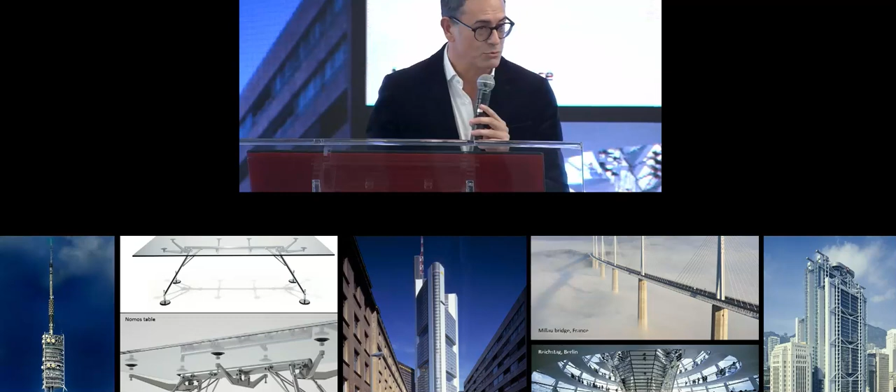Then there was my visit to the Reichstag in Berlin, where Norman Foster was commissioned to build the famous dome. It is an extremely symbolic structure, beautiful from an architectural and artistic perspective, and incredibly intriguing in terms of the solutions adopted. I must admit that Norman Foster's projects often are a source of inspiration for us designers, a way to envision the future. An example of this is the Ferrari F80 that you saw downstairs, a supercar that aims to capture the essence of a very ambitious project and did so with an architectural and futuristic approach.

This brings me to a statement by Lord Foster, one in particular that is as relevant as meaningful for us at Ferrari: as an architect, you design for the present with an awareness of the past for a future which is essentially unknown. Now I welcome Lord Norman Foster, thank him for accepting our invitation, and give him the floor.

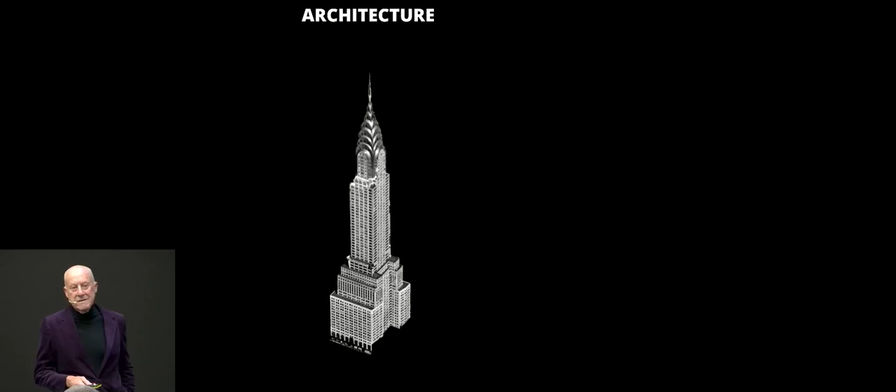New York today is like New York in the 30s. It's a collection of individual buildings, and those individual buildings collectively make up the city. But there are really two worlds: the world of the architecture of the individual building, and the urbanism, you could call it the urban glue that binds them all together. That's the DNA of the city. It's the routes, the subways, the public spaces, the parks. So I'd really like to share some

experiences over my immersion in those two worlds of architecture and urbanism, now around 7 decades. And the theme perhaps that unifies the projects that I'll show, which jump from the past, the earliest projects, to the present, is the theme of innovation. And what do we mean by innovation? Well, it's challenging the status quo. It's about change, and for me, it's about the use of technology for social good. It's about new ideas and methods, and in many cases it's perhaps going back to basics, going back to the

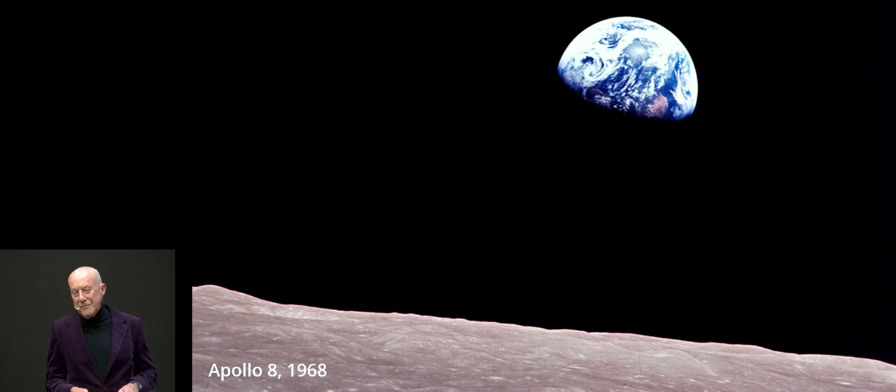lessons of history. And where did that start? It started in the 1960s. And the 1960s was arguably the birth of the Green Movement, although it hadn't been named as the Green Movement then. It was very much a fringe activity. And as architects, we were part of that fringe, seeking to explore an architecture that would relate to that new awareness of the fragility of the planet, which was perhaps initially summed up by the Earthrise photograph taken on the Apollo 8 mission.

But that coincided - that was 1968, and perhaps more than coincidence, one year later, Buckminster Fuller penned the Operating Manual for Spaceship Earth. And Silent Spring, Rachel Carson drew attention to not just the fragility of the planet, but rather the ecosystems that constituted it. And in the popular world, the Whole Earth Catalogue was the transition between the analog world and anticipated a digital future in terms of access to information.

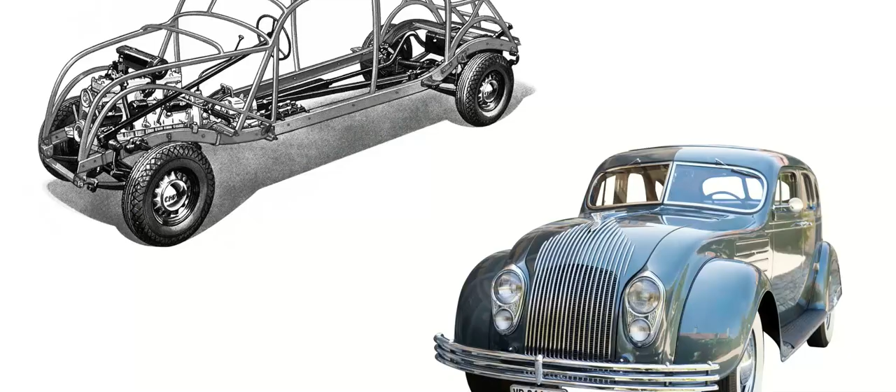Cybernetics was perhaps summing up something that had existed for some time: the idea that a product, a design, was rooted in systems. If you could bring together, in our interpretation as designers, separate systems and merge and unify them, you could do more with less, you could improve performance. Perhaps in automotive terms, that was the Airflow, which was perhaps the first production car that would take the earlier concept of a chassis and a coachwork and bring the two together to make a single monocoque structure.

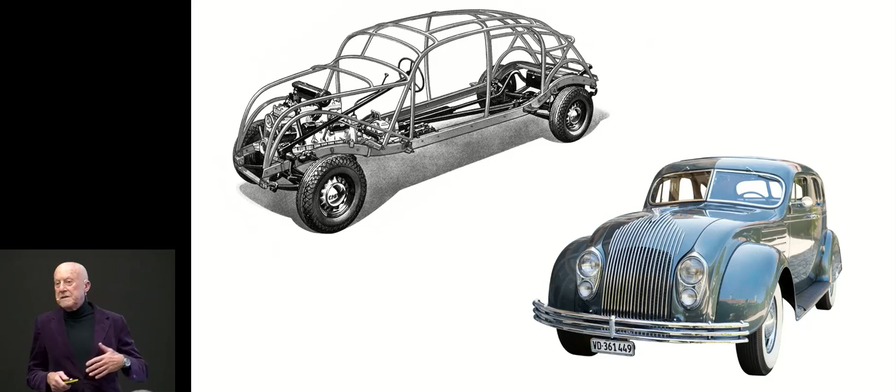Those principles would come together in one of the first buildings, an ultra-low-cost factory for semiconductors, which was the new digital world. I'm talking now about the mid-1960s. If I do a kind of cut-through perspective to show the systems that come together to make that building, it would look something like this.

These colored elements, which you see buried in the floor, are anticipatory, in that the floor slab is more than just structure. It's got the reinforcing rods, but it's also got small bore pipes, so it's doing more than just structure—it's heating and cooling as water pulses through it. And the corrugated metal ceiling has the fluorescent light tube, so it's doing double duty.

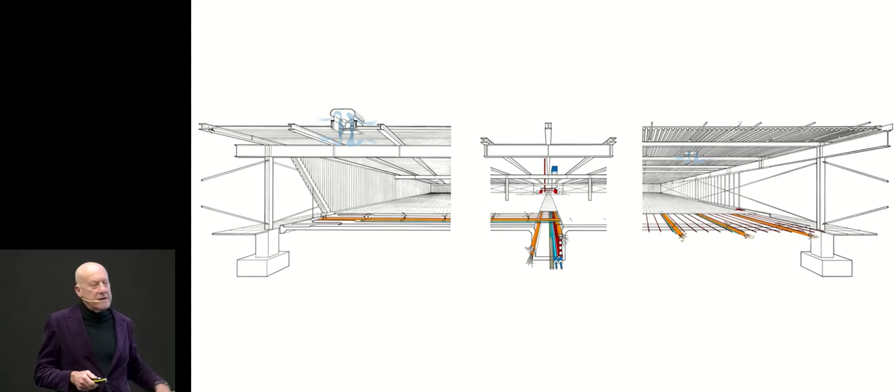If the building was innovatory in terms of its systems, the way in which it came together, it was also socially revolutionary in that it was one single space, one entrance, one standard for management and workers.

Socially, the most deprived area of London—if that was the 60s, then I'm coming now to the early 70s—the most deprived area in London was Docklands, the London docks. That was the scene of militancy. This was a commission for a Norwegian shipping firm.

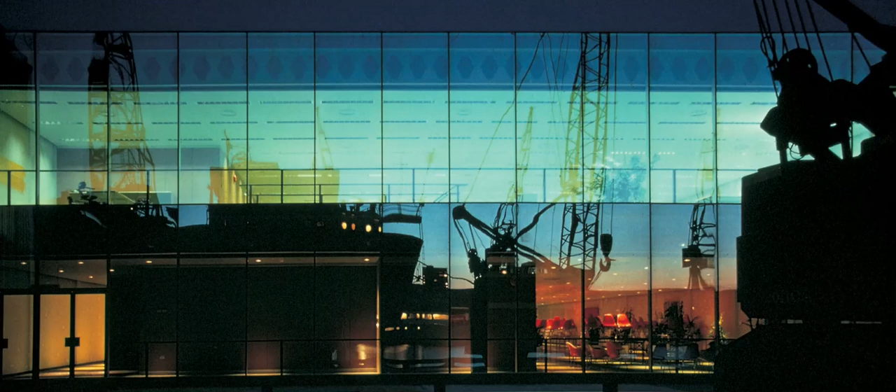Again, those parallel worlds of technological change and social change merged together, and the idea that in one building, revolutionary at the time, those two elements of the workers and the management could come together under one roof.

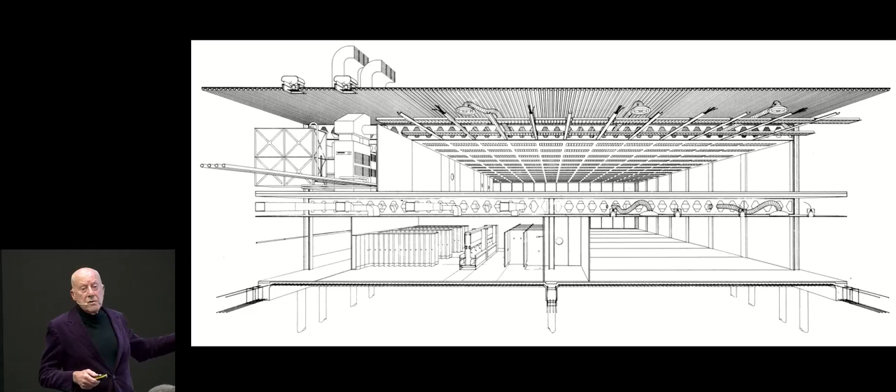So the light fittings would be the extracts for the system of cooling and heating—heat recovery—and the structure would be the perforated plenum. At the bottom level would be extraordinary facilities, like a luxury sports club, unheard of at that time, and offices with carpets, with planting, with art on the wall, with views.

Again, it's very difficult to transport oneself back into that period in the 60s and 70s. What was the typical workspace? It was pretty horrific. So if it was revolutionary in Ipswich, it would have been revolutionary anywhere in the country at that time.

There is a very close relationship in terms of innovation, sustainability, and the natural world, working with nature. One of the earliest projects for the owners of that shipping line, a Norwegian shipping line, Olsen's, was an unbuilt project to relocate headquarters in a pine forest just outside Oslo.

Here you can see the path through the forest, and the idea of the office headquarters being pavilions which would sit very lightly in the forest and not disturb it, with cars held at bay. If I gave a verbal description of this project, it would be almost identical to the Apple headquarters, which I'll show later, built about 50 years after.

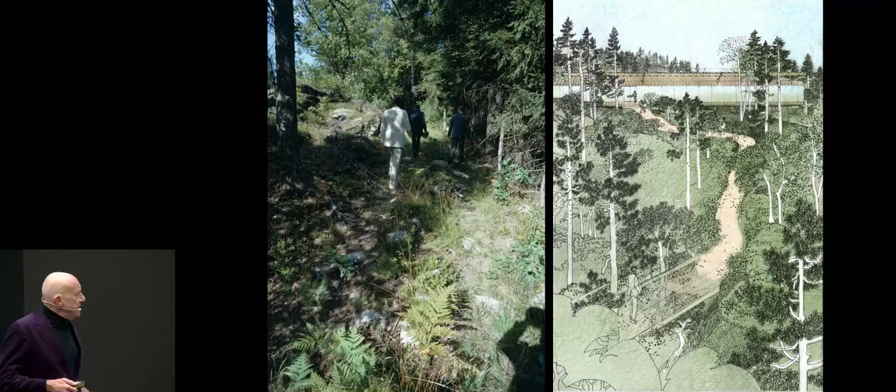This cut-through model shows that it sits lightly in the forest and doesn't disturb nature. There are systems below ground which echo the very earliest sketches: the use of sunlight, mirrors which will reflect light directly into the depth of the interior, working with natural ventilation, a breathing building which is healthier, using less energy, recirculating water, and converting human waste to fertilizer.

At that time, quite revolutionary concepts were embodied in the first built building of that period, which is a center for the visual arts in the University of East Anglia, housing an extraordinary private collection of Sir Robert and Lady Sainsbury. But instead of producing three buildings - one for the Faculty of History of Art, another for a common room restaurant, and another for exhibiting the collection - it's one roof which brings together and unites all those elements.

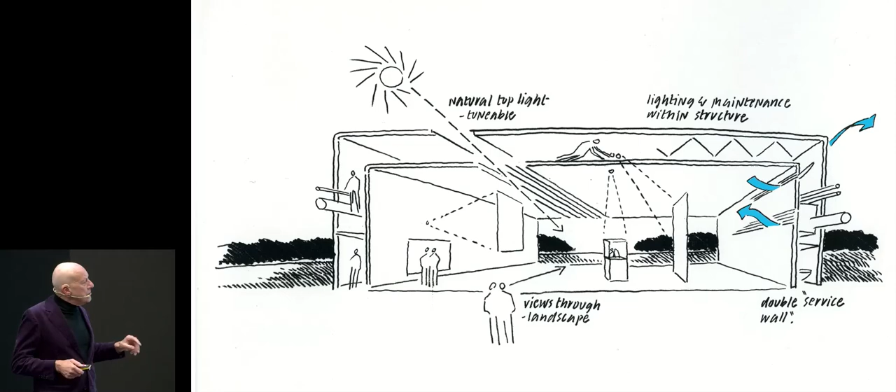As you can see through this diagrammatic cross-section through the building, it's very much about working with the local climate, which is always cool at night, displacing and bringing in cool air, circulating, saving energy, and again, a healthier building. The diagram also indicates that if that is innovatory in its technology, then socially, and in the way in which you might display works of art, it's perhaps the first museum or gallery where there are no walls on which to display works of art.

Instead, it's a series of movable panels, vitrines, and signified by a tunable light box. So it can be filled with natural light or it can be tuned down. If the exhibition is dominant on works on paper, then the light levels can be reduced to more artificial light than natural light. So highly tunable.

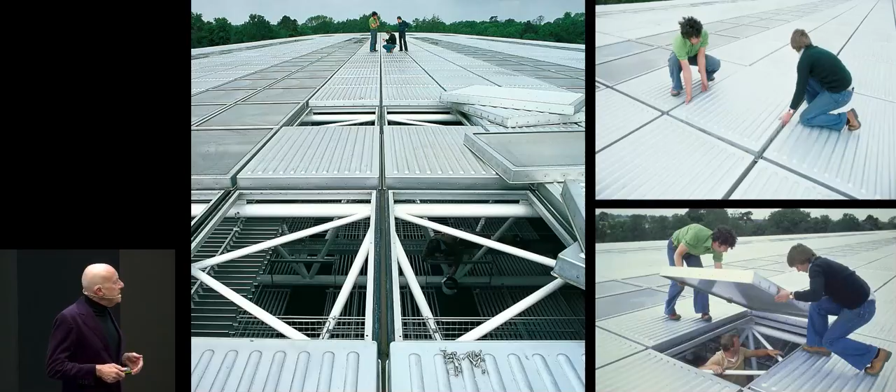If I look at the back of the building and the access to the very discreet underground undercroft servicing this lightweight canopy above, then if it was revolutionary and innovatory as a museum, it heralded all the clues for reinventing the airport. So a reminder really of what the airport was in the 1990s. This is very typical: heavy servicing, moving air, essentially cutting out daylight.

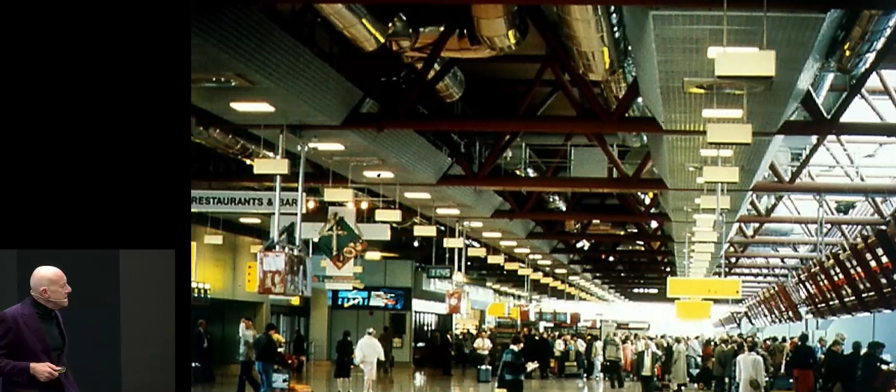If I took a slice through that building, it would look something like this. You would see the image at the bottom, which is how you would experience it as a passenger. If you were on the roof, you'd see all this mechanical plant. You'd have to have scissor lifts to change the light fittings, and for replacement and maintenance of the air conditioning, you'd have to get on the roof. So really, a gas guzzler in terms of energy consumption, quite grim as an experience, and not exactly easy to maintain.

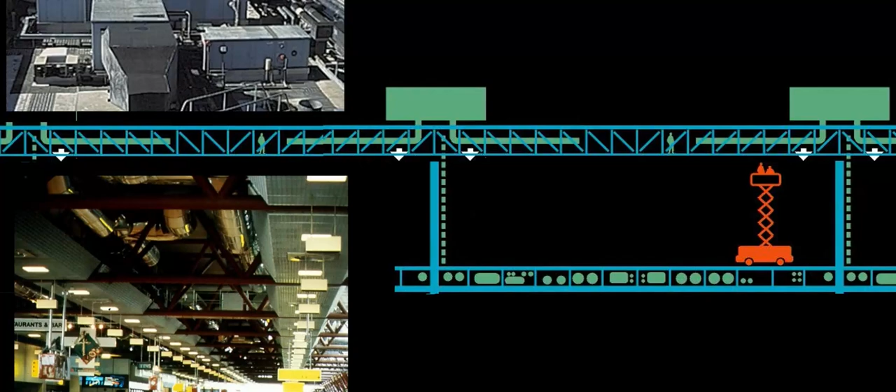So our move, in terms of learning from that Sainsbury Centre model and translating that into a new kind of airport, was almost to turn this upside down. And that transition then: the undercroft, like the Sainsbury Centre, has all the mechanical equipment - you can get at it very, very easily. And it's a lightweight canopy which admits the sun, so there's no dependence on electric, energy-consuming lighting.

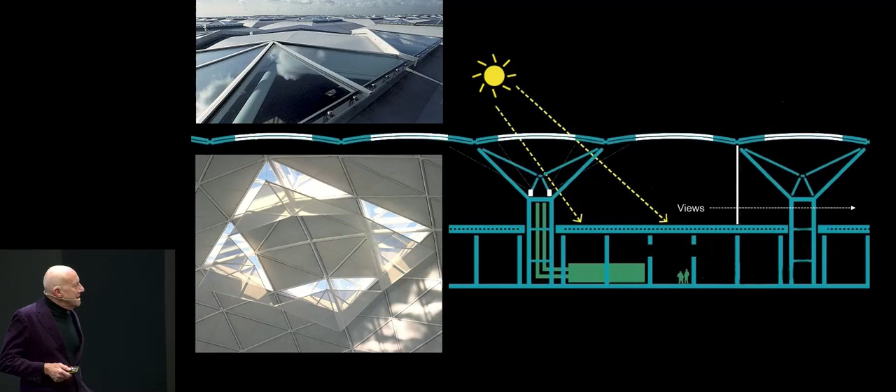It's an analog experience in a digital world, because you open up and you know where you are in terms of the airfield, the setting. I liken that, in many ways, the old model, to the old model of an aircraft - it was a truss structure, as opposed to one of the emblematic images of modernity, which is the cantilever, and which comes forth in a modern aircraft and is echoed in this structure.

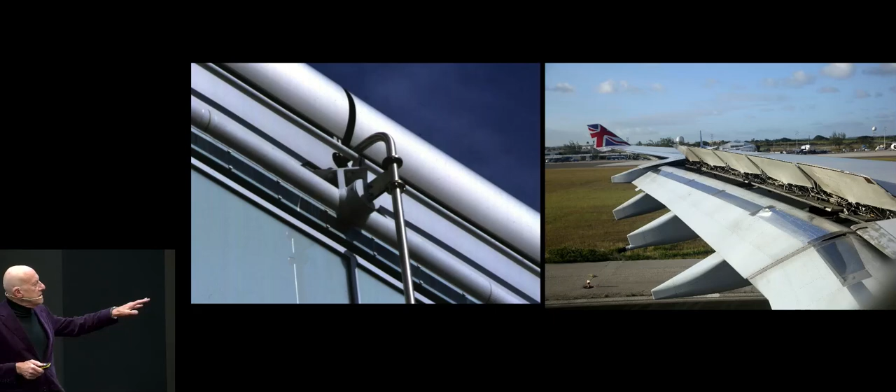Here you can see this lightweight roof, which is full of natural light, calculated to bring in some deliberate shadowing on the floor to animate it. One of the difficulties of a roof which is so light is that the wind, the air currents over it, can create an uplift. And interestingly, the edges of that learn from the world of aeronautics, in that there are spoilers on the edge to break down and create the turbulence and destroy the uplift.

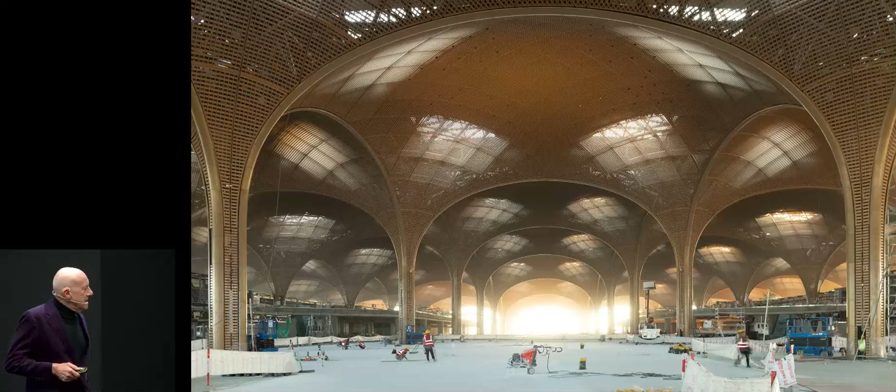If that was reinventing the airport, then subsequently, and right up to today, we're developing that model from Hong Kong to Beijing. Here's Beijing - the scale of the roof now much more like a kind of artificial sky. Another version of it, underground servicing, top light. This is Jordan, and more recently Cambodia, which is, as you can see, under construction. It's not commissioned yet, but continues that exploration of how you best combine the kind of magical, spiritual properties of natural light, while continuing that quest to find a more energy-efficient building.

There was the potential to make a quantum leap in terms of another reinvention, and that was what happens - this was Mexico Airport - what happens if you dissolve that roof into the columns?

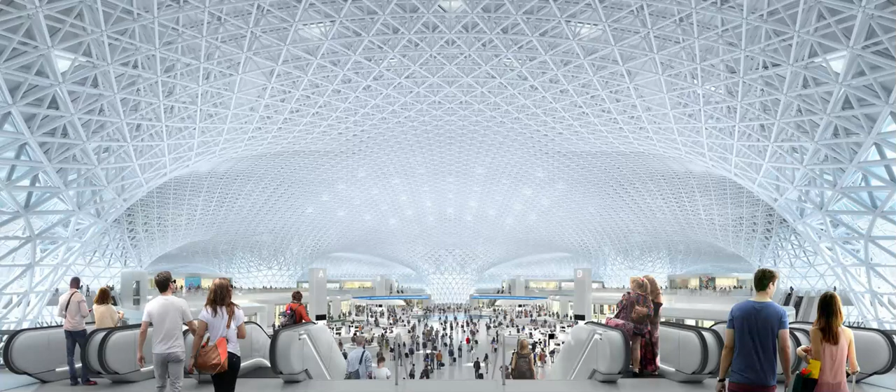What happens if those columns become like funnels, and they funnel light and handle water runoff? Just a hint of what that might look like internally. So a massive leap in terms of the spans, a doubling of the spans for more flexibility for the future.

More optimistically, if one moves into the next big airport of the future, which is a recent competition that we won, for Riyadh Airport, this is truly mega.

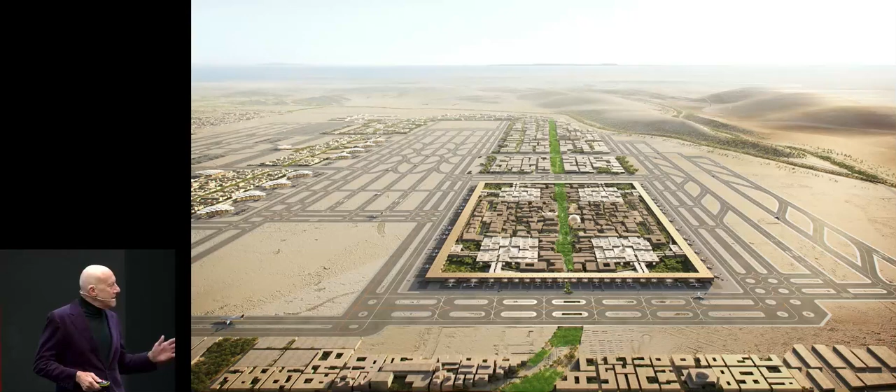If we look at the history of an airport, it accumulates all kinds of other activities in a random sort of way. It becomes a mini city. So here we're saying, accept it, it's a city. Design it as a city, not as a terminal from the start. So it's like a walled city, and running through the heart of it, connecting it with the center of Riyadh, is a kind of an oasis that permeates through this walled city.

And the walled city - what do we learn from architecture in the desert before an age of cheap electricity, when you can just throw a switch and air conditioning kicks in? What are the lessons of a past architecture? Not as a nostalgic exercise, but to learn valuable lessons to improve quality of life and reduce energy, in terms of a desert architecture of the present.

So the project is called Masdar. It's an Institute for Renewable Energy in Abu Dhabi, and it's powered in part - I say in part because it's only using 40% of the energy from this solar field - but it's active 24 hours, 7 days a week as an energy-intensive research center.

Probably if I compare models, interestingly, the heart of Dubai, which uses models appropriate to a Western model of a city, is actually hotter than the desert that surrounds it, because of all the black asphalt, the exposed glass, and the spacing.

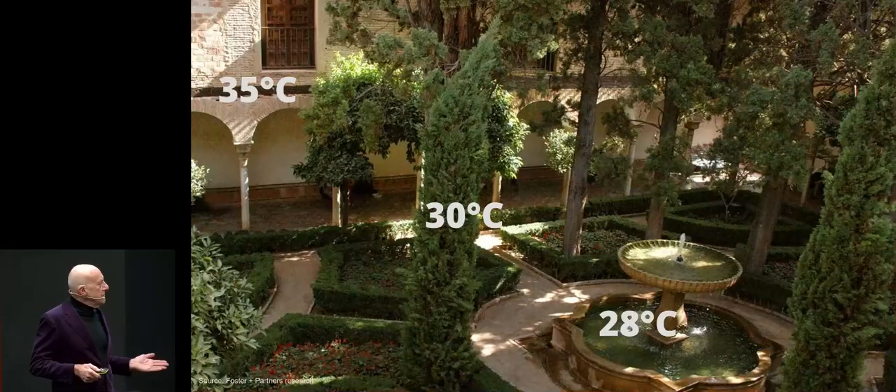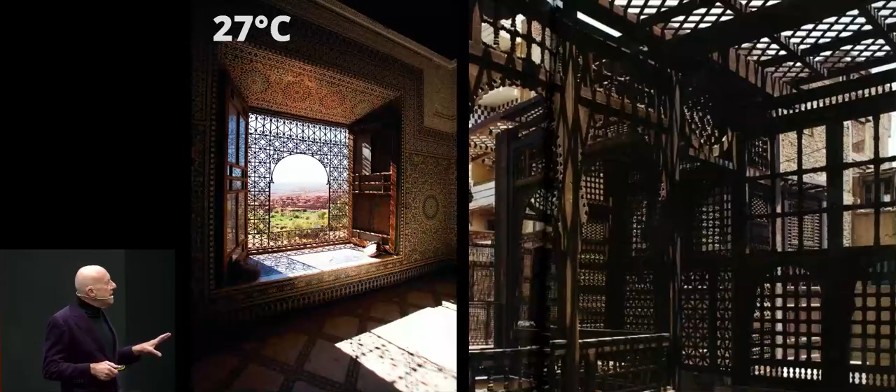If we go back in time to find the lessons of the past - shade, colonnades, vegetation, evaporative cooling - they progressively bring down the temperature, and the dwellings themselves, by screening and layering, come down to a much more habitable 27 degrees. So if you could use those devices, translate them in modern terms, and add solar, then you really are starting to make progress.

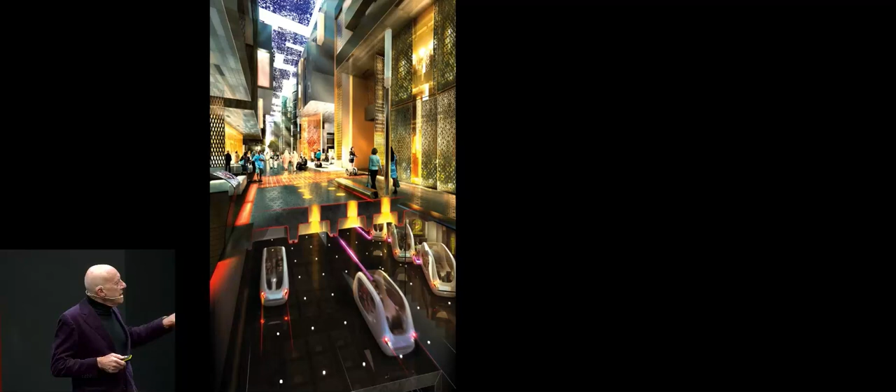The original cross-section envisaged - this became active something like 15 years ago - the idea of driverless vehicles that would induction charge, and then at a lower level enable the streets to be scaled for the pedestrian with shading. Those operate today. Here you can see the induction charging pads for the vehicles that roam around and host the many tourists who continue to visit it.

Also in Abu Dhabi, and working with the natural world, is the National Museum, Sheikh Zayed Museum, which is very much about the history of the Emirates. As you can see, the sails are emblematic of falconry, of flight, and they mark the spaces below.

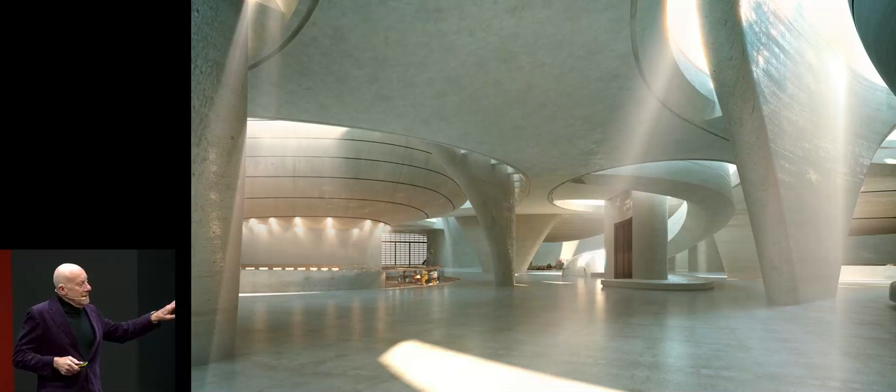These are already built, and they'll be commissioned next year, but I'm not allowed to show the photographs because they're embargoed until the building opens.

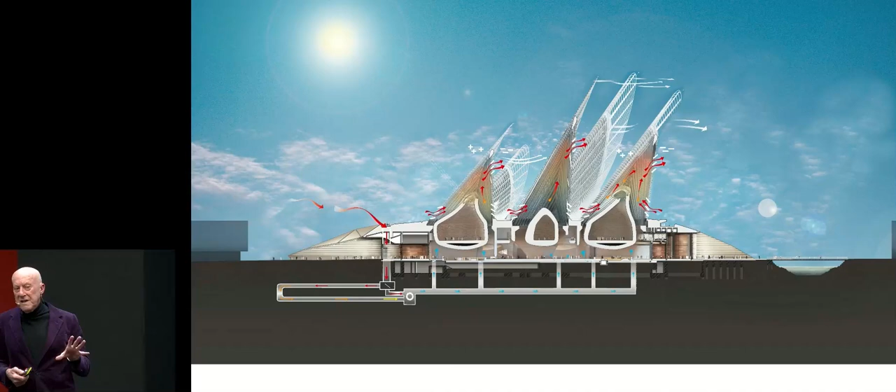Here you can see the diagram of how the ecology of the building works, and underneath you can see these pipes. Below the desert it's always cool, so you pull the air through the cool earth and it's already cooled. So how do you draw it out through the exhibition spaces? The idea is that these fins create heat, so they then trigger thermals - rising currents of air.

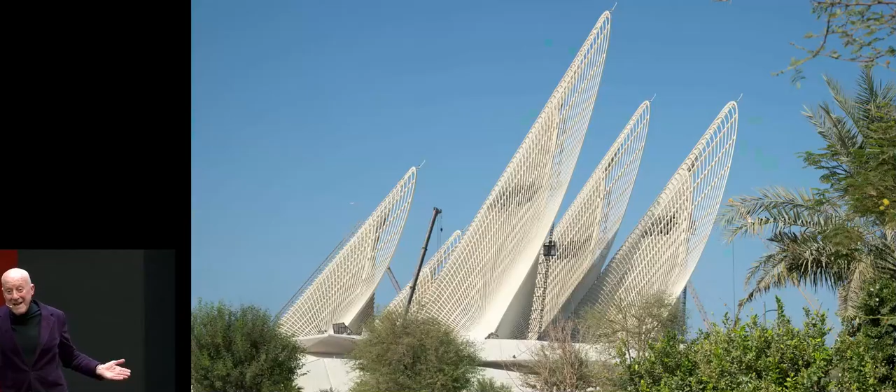Although I'm not allowed to show photographs of the exterior, the reality is that anybody can drive around this and photograph it. So this is not the rendering.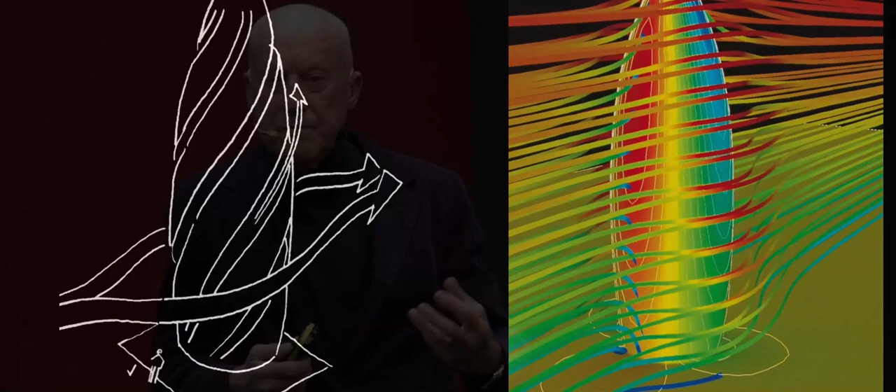And like the wings of any flying machine, the movement of air speeding up on one side creates a low-pressure area. That's the principle we've applied in many tall buildings, particularly the building popularly known as the Gherkin. The difference between high and low pressure, the wind coming from any direction, and the spiral of the atrium—the green lung, the breathing lung of the building—spirals around it. Here you can see that building in the cityscape.

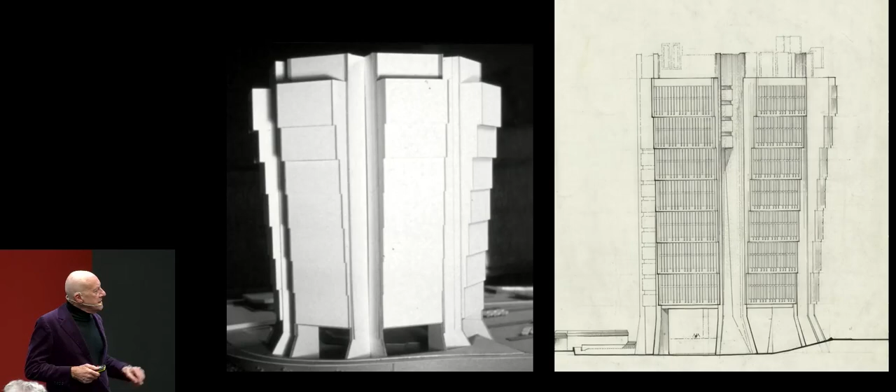But our innovations on tall buildings start before practice. They start really traditionally with the first image I showed, which is the Chrysler Building. Interestingly, up to relatively recently, every tall building would be a version of that model: a central core of structure, elevators, bathrooms, mechanical plant, surrounded by a ribbon of space. I challenged that as a student at Yale in the master's class in the early 1960s, 1961. This building was later described by the dean of Yale as the model that made possible the Hong Kong Bank, which was a competition in 1979.

What was revolutionary about this building, apart from its suspended structure and breaking down the scale with kind of villages at double heights as you go up, was the idea that there was no central core. The core is fragmented, it's on the sides, so that enables the space to be open—you can see the views through that space. Again, no coincidence, this became the first tall building able to take a dealer's floor, because a dealer's floor depends on line of sight. And with no central core, you have infinite flexibility.

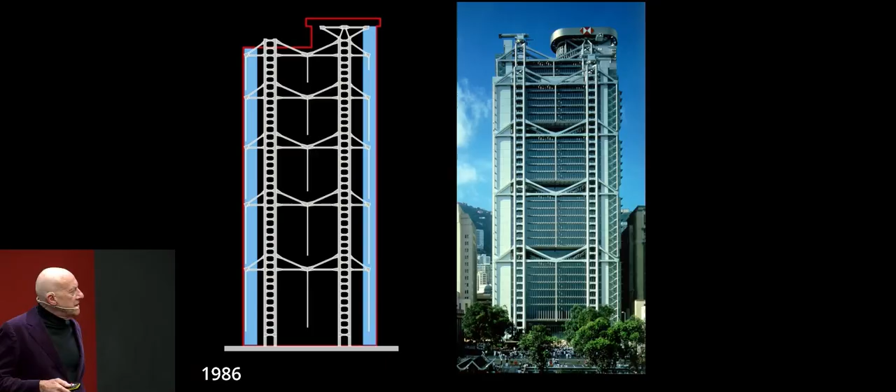It also means that without the central core at the base of the building, you can lift the whole building up—people can walk underneath it, which they do—and also create a cathedral-like banking hall right in the heart at the base of the building. So it's liberating. It's very much about the design.

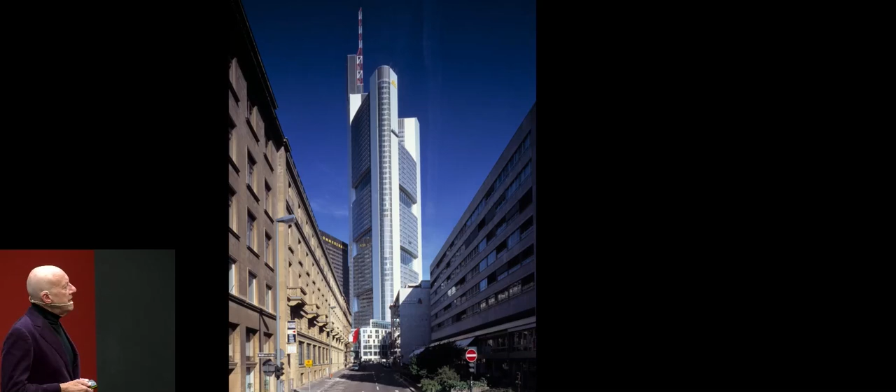If I give a glimpse of one or two other explorations in tall towers, this is the Commerzbank building of the 1990s in Frankfurt, and those interruptions as you go up bring nature and fresh air into the heart of the building, into the central atrium. Everybody has the combination of a view to nature and out to the city beyond.

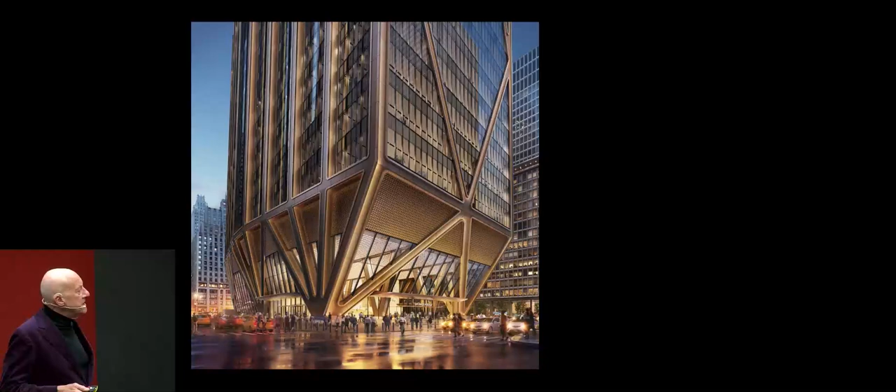If I bring the tall tower story more up to date, this is a building under construction for JP Morgan on Park Avenue, and the structure here is again an innovatory structure. It brings the forces down on three critical points, avoiding the interruptions below onto the bedrock, and that cantilever enables a significant increase in public space over the previous building, which came down in a very traditional manner—something like 2.5 times the amount of space in the public domain.

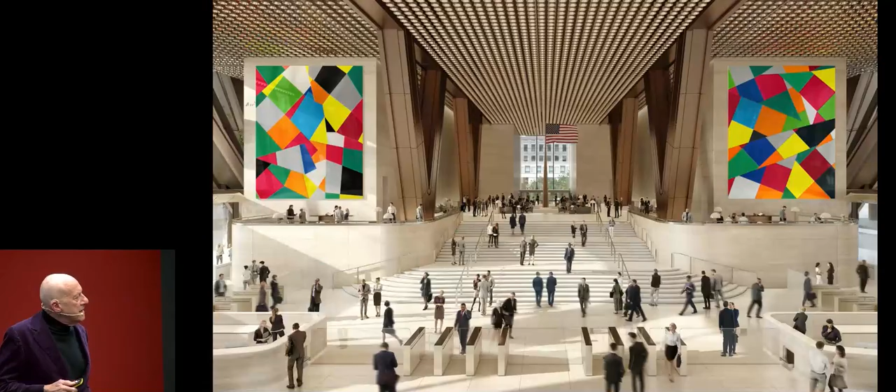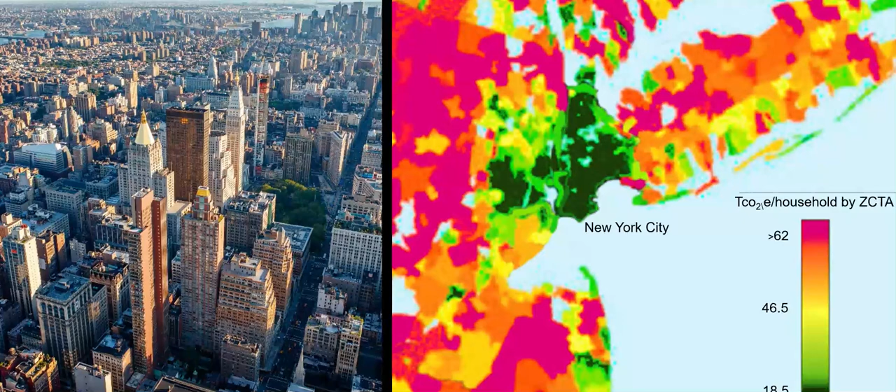It's also a reminder that traditionally we associate the tall building with a kind of obsessive consumption of energy. So popularly, it's supposed to be the anti-green type of building. The reality in terms of the data is otherwise. Two Berkeley researchers looked at the carbon footprint of the East Coast, focusing on the scale of high carbon shown in red and yellow, while low and dramatically low carbon is dark green. Interestingly, the dark green is Manhattan. The reason Manhattan is more sustainable than the sprawl surrounding it is that it has a high dependence on public transport, it's compact, it's walkable, and that translates into a much more sustainable city model.

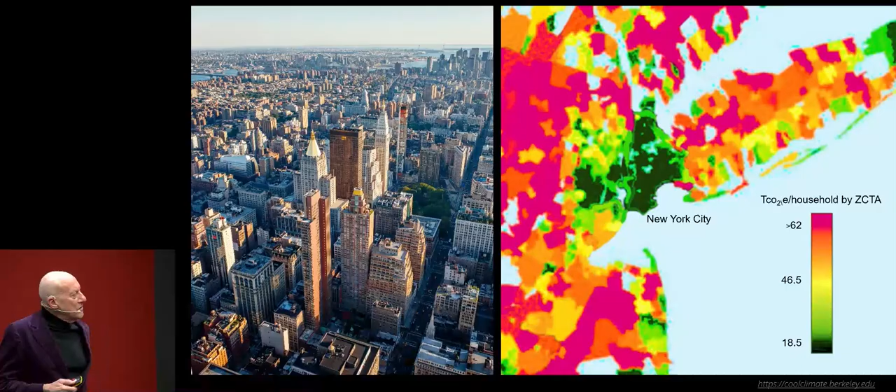If I show those kinds of buildings which by their nature, by their location, are tall because the communities, the cities are high density, then I'll show the polar opposite, where it's a lower rise, historic center. It's a market town in the

east of England called Ipswich. And here, it's a new kind of building, which we called a ground scraper. So it's very deep, it goes to the edges of the site, it recreates the historic street pattern, so it's very friendly in civic terms.

And if you looked from the street at night, at the time, which was, again, another innovation, the suspended glass wall, then you see a building which is essentially low and deep. And at the heart of that space is sunlight, natural light, and movement vertically by escalators, much more socially friendly than the traditional lifts, elevators.

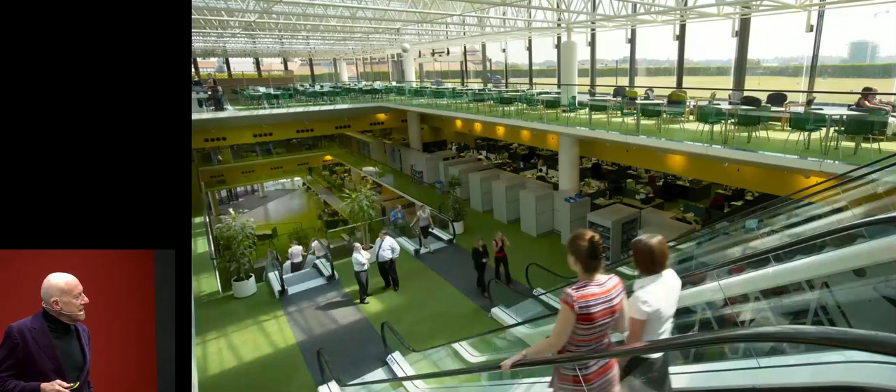And those escalators connect the world at the base with the world at the top, which is a roof garden. And I perhaps spend more time and images on this project because it anticipated what is, I truly believe, the workplace of the future, which is very socially oriented and very much about lifestyle. And the lifestyle here was connecting an Olympic-size swimming pool at the base of the building with a roof garden at the top. And the point that was made earlier about designing for a future which is unknown, that systems approach here of incorporating a void in the floor.

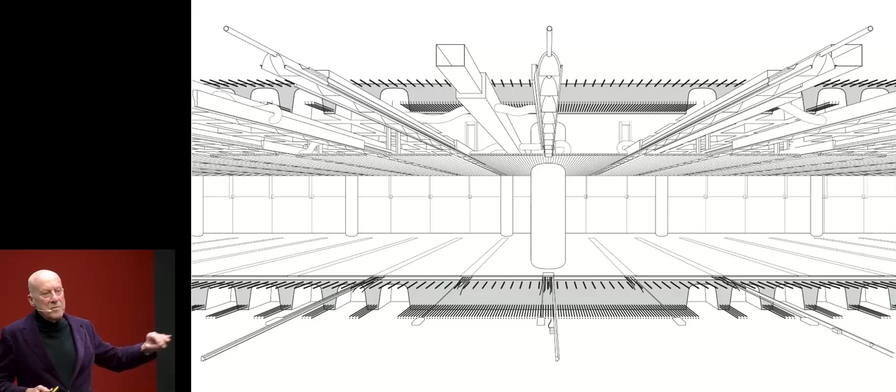So the prefabricated floor was about building quickly, more economically, getting more value for money, but at the same time, future-proofing, something that, as somebody once said at the anniversary of this building, and this building is half a century old now, it celebrates its birthday next year.

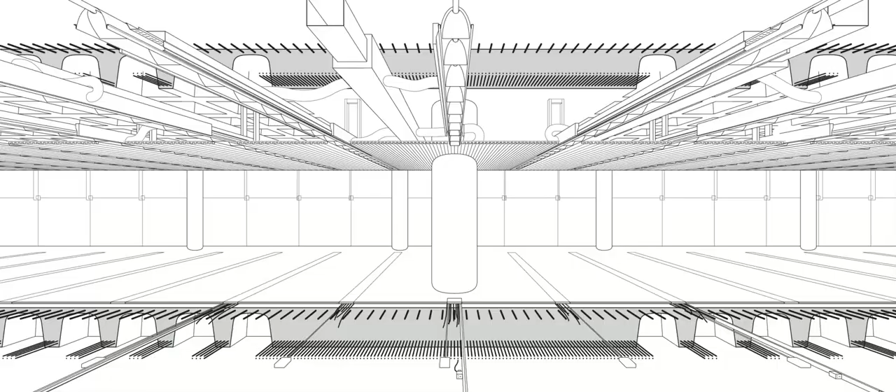And when it opened, it was very much the world of the typewriter. And quite interestingly, I was shown in Flavio's office the extraordinary Valentine typewriter of the past.

And at one anniversary, the kind of leaders of the company who had come out of retirement said something like, Norman was always talking about flexibility for the future, and it seemed to humor him, and it didn't seem to cost us too much more. But we never in our wildest dreams imagined that there would be the digital revolution, and we would be able to encompass that in our buildings when all the competitors had to really build anew.

The more up-to-date version of that, a very recent project, but rooted in the same principles in the historic centre of London. So feeling that a tall building would not be appropriate, but a lower building, picking up the historic Roman route of the Watling Street and giving that the clue to break down the scale of the building, to create a colonnade within it.

And here you can see the colonnade. What you don't see in detail is the public space that marks the end of that. And here, incorporating the work of an artist, Cristina Iglesias, as a water feature. And again, very subtle, this doesn't tell you that this is about security, but it also is.

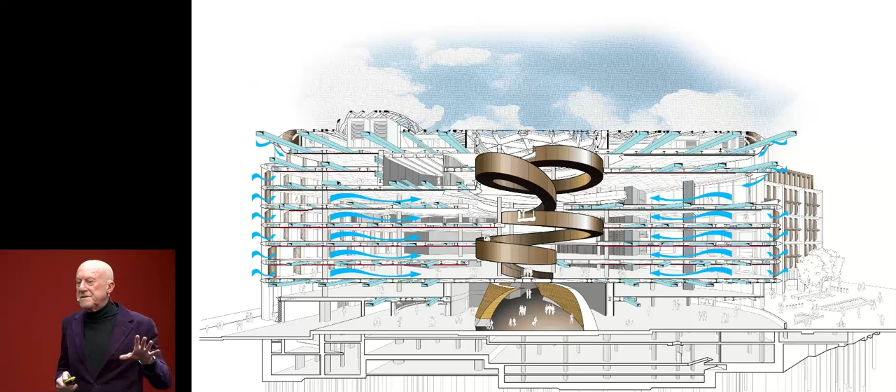It's not just a social gathering spot, but it's also protection against truck bombs, which normally come as very, very ugly, intrusive structures. And so this, I should have explained perhaps in passing that those bronze gills that you saw on the outside were the elements which bring in air from the outside, which filter it and which noise attenuate it, reduce the noise level, and bring it in deep into the heart of the space.

Now, this again is quite revolutionary because this is uncharted territory. How do you move air naturally, and how do you, over its passage over that distance, temper it? And at the heart is the spiral that connects the bottom of the building to the top.

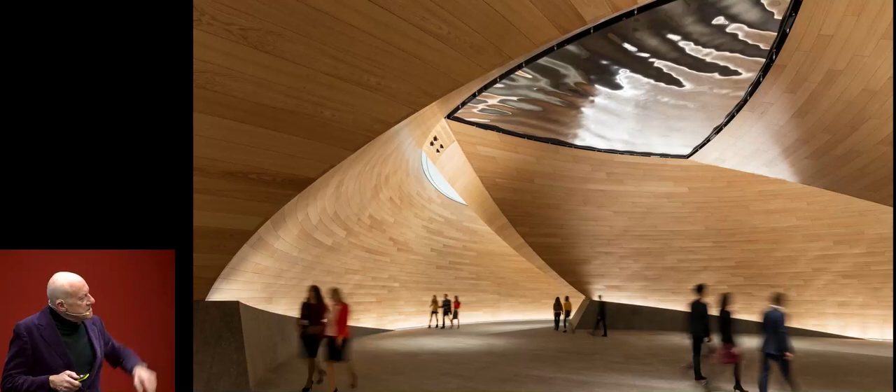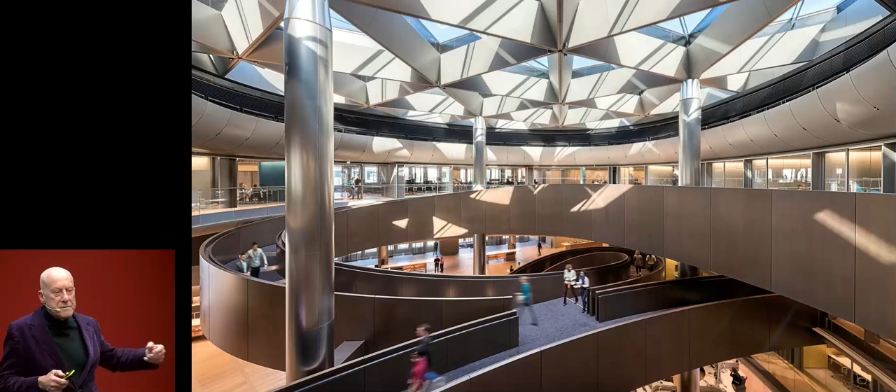And if we look at the entrance space at the bottom, that combines a work of art, which is the stainless steel kind of lake in the ceiling that connects with the ramp at the upper levels. And here it's bringing in natural light, it's extracting the air.

And that air is pulled over a ceiling, which we invented for the project. And this ceiling is enabling all kinds of things to happen. Incidentally, this is called the pantry. And so the movement within the building is deliberately calculated

for social contact. So if you work on the second floor, you still have to go through the pantry at level six and then drop down to the second floor. So all the visitors, the studios in Bloomberg, the Bloomberg headquarters in Europe are clustered here.

And that ceiling is enabling, because of its acoustic properties, it's enabling another invention, which is a wooden floor. And that wooden floor is magneted, so it's above a total access floor, because a wooden floor is not normally associated with flexibility.

And here we come to some resolution of preferences. Mike Bloomberg always loved the idea of having a wooden floor in an office, which is counterintuitive, because if you have open spaces, you have noise levels. But that's made possible by this ceiling, which is a series of metal aluminum petals, configured so there's a lot of surface area. They're not just working acoustically.

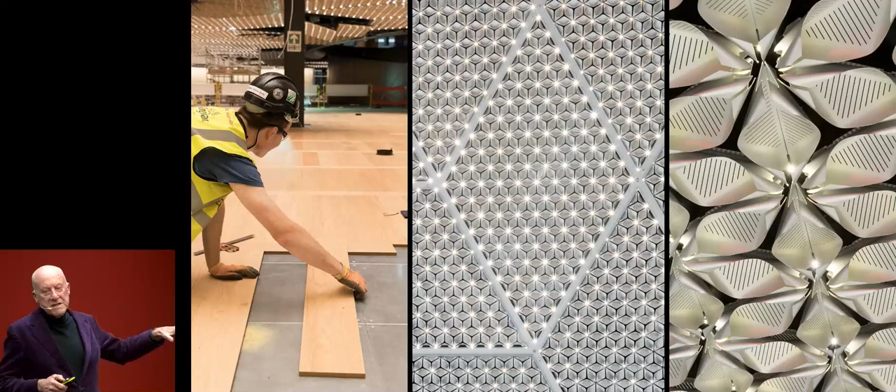There are 500,000 LEDs throughout the building, so they're a very efficient lighting fixture. And at the same time, they either go hot or cold, so that the air which is pulled over them is tempered.

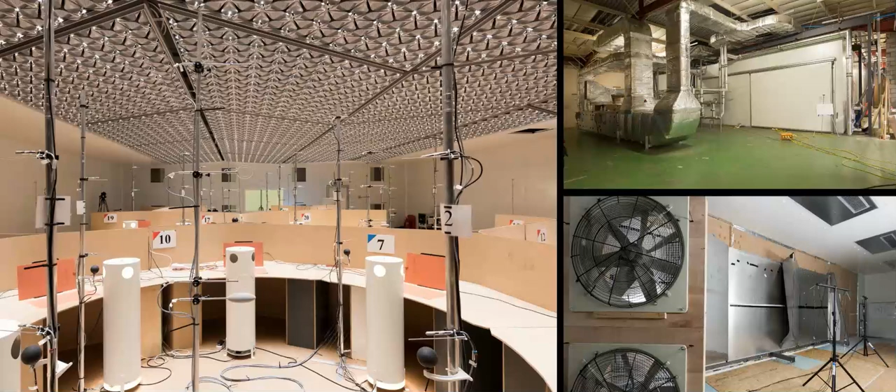Now, I haven't talked about research, but just a glimpse into our research and the research of others related to these themes. So here we built in a warehouse an installation using all those elements of the ceiling, clustered around this space, and these individual workstations are simulated individuals. We're reading the performance over different periods of the year, extreme temperatures, humidity. So it's really testing the validity of this concept, which worked not just for Bloomberg, but also, as I'll show you shortly, for Apple.

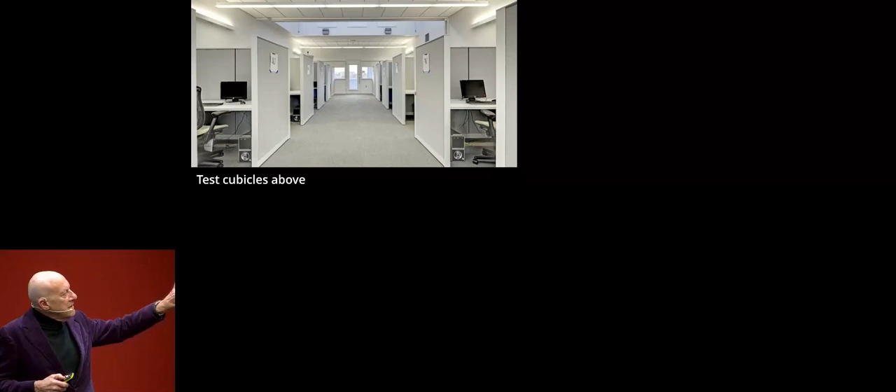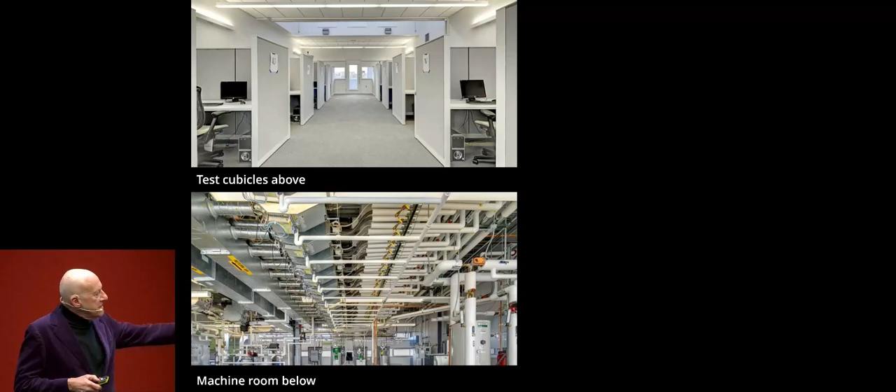The research of others we've collaborated with, the Harvard School of Public Health - these are test cubicles, and the working conditions are simulated from a traditional office building, recirculating air through a central system, as opposed to the kind of buildings I've described, which pull large volumes of fresh air, reducing energy and creating a healthier environment. It's this machine room below these spaces which makes that possible.

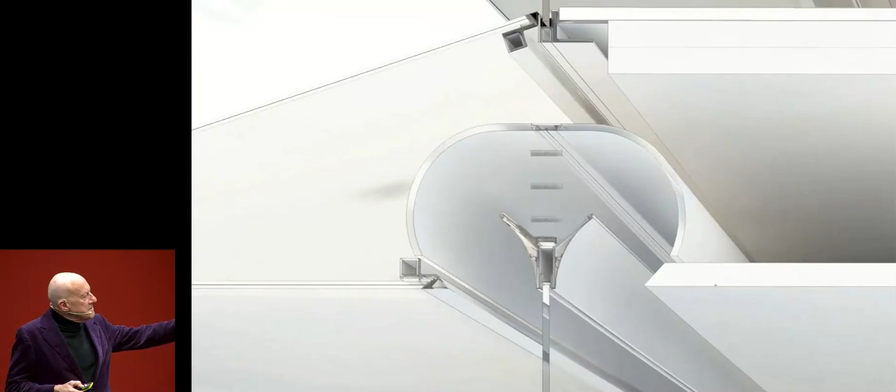And how do you put another building into that site? I'll be showing you shortly. But just a quick detail of that very familiar edge with the eyebrow - that's again how that junction with the long curved glass panes brings in the fresh air and filters it.

And the Steve Jobs Theatre, we realized as a circular building, and perhaps the inspiration was a mini solid disc, almost like a flying saucer. And that was realized as a composite, the same technology as the sailplane that I showed, which is a vast disc that literally floats.

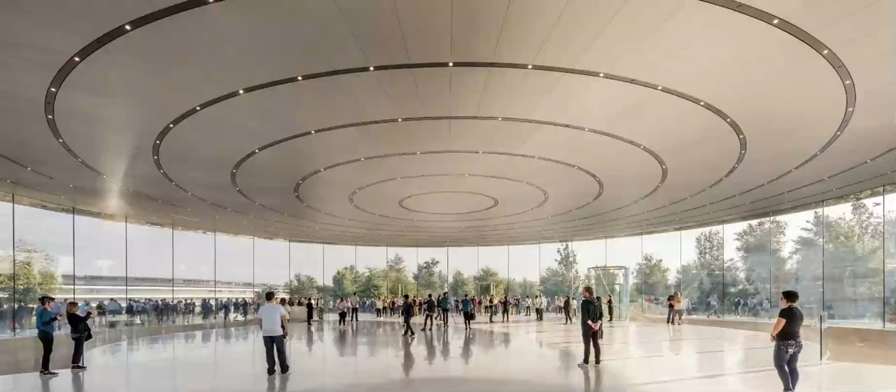Above a structural glass drum, so that 80 tons of roof and everything going up to the roof in terms of fire protection systems, water, electricity, is all going up through the joints in that glass, so that when you're under the entrance to the theater, you have this complete weightless disc hovering like a flying saucer above.

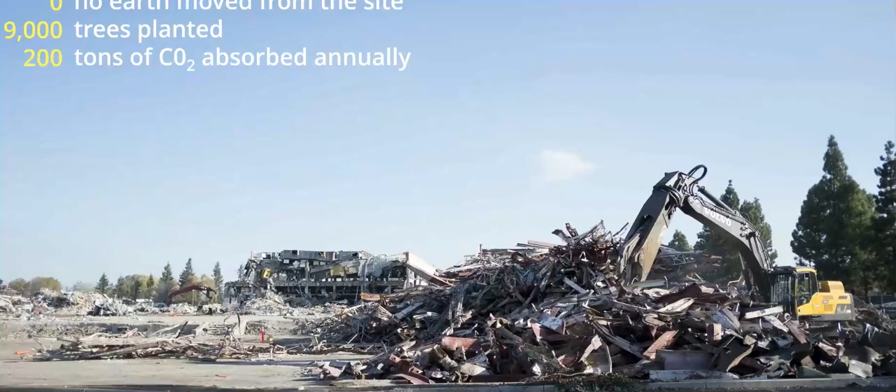With 360-degree views. The story in energy terms is totally self-sufficient as a building. And it recycled all of the original 24 buildings which occupied the site, which have since been transformed into this world of nature, planting 9,000 trees and something like 30 or 40,000 vegetation bushes and so on.

So recycling - but recycling is not just materials. Recycling, perhaps the ultimately sustainable building, is a building which is recycled itself. And here the Reichstag is recycled.

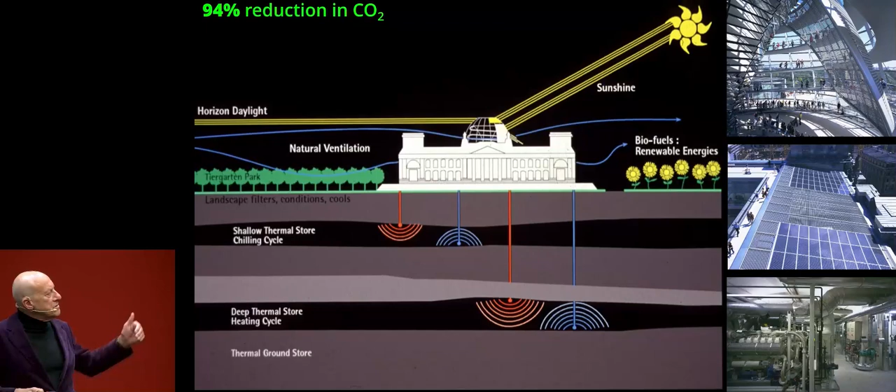It was transformed in the interim period by Jean-Claude and Christo with its wrapping, and the cupola, which is emblematic of democracy in action, illuminated at night, is also the clue to its ecological story, because it's a zero-carbon building, using all the armory of sunshine, reflecting it deep into the heart of the building, using natural ventilation, thermal storage below ground, co-generating with biomass, PVs - all the familiar elements.

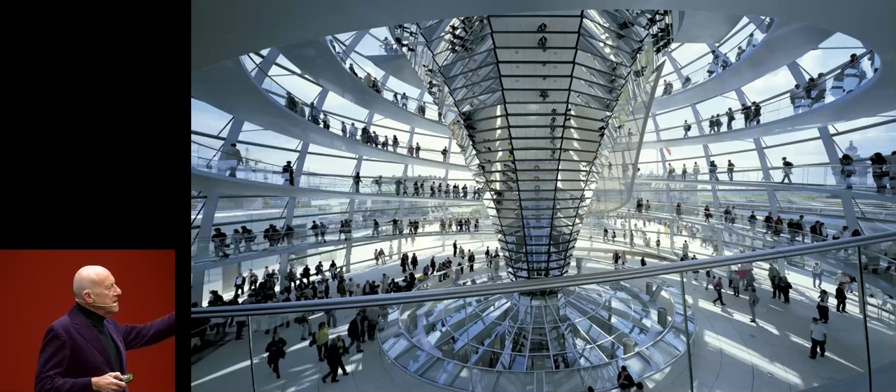And here in the 1990s, that, of course, is the public space, the spiral, voted for by the parliamentarians - the ability for the public, to whom the politicians are answerable, to symbolically look down upon them in the debating chamber below. And that is the most visited parliament building, with extraordinary queues, the attraction of the public space.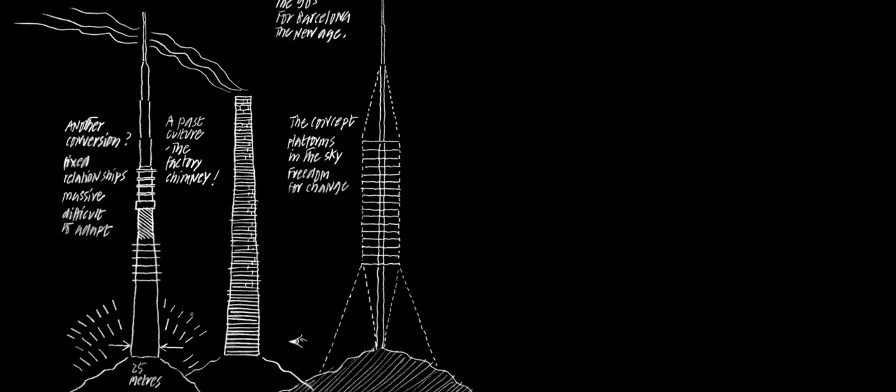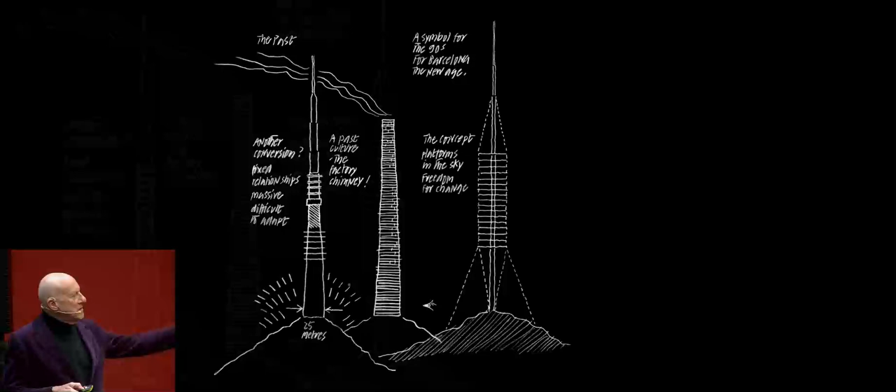If we translated that into a vertical cantilever, as you referenced earlier, Flavio, there's the project of Collserola in Barcelona. That was a competition, and right at the last moment, just before the presentation, I thought, how do we communicate the idea of what we've done? In a hotel lobby with a small team, we produced sketches showing what a conventional communication tower would be, rooted in a massive concrete column.

Of course, by using this suspension structure, we dematerialize that, and it virtually disappears as a structure. Again, doing more with less, balancing and minimum disturbance to nature, rather like the principles of that project in the Norwegian forest. And again, how do you respect an extraordinary landscape, the Massif Central, and the main arterial highway connecting Paris with Barcelona?

When it comes to this extraordinary valley, you're getting 5-hour delays, pollution, traffic at a standstill, and this was the response to that project.

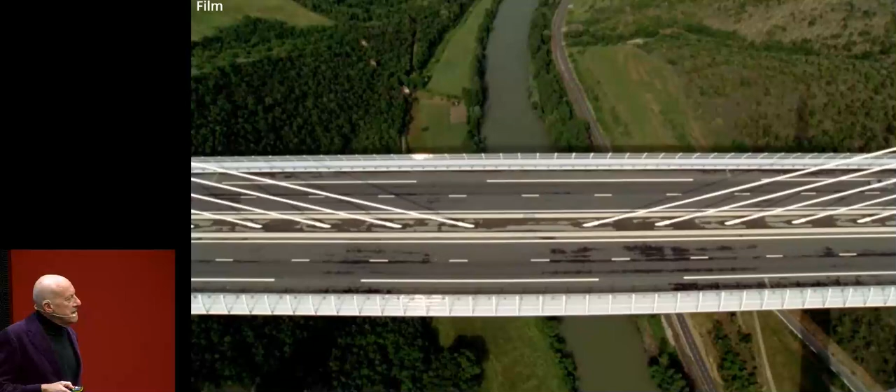Just to give an idea of the scale, as it goes over 2.5 kilometers, it is the highest in the world. It's the same height as the observation deck of the Eiffel Tower. The 7 piers march across the landscape on a very gentle arc of 20 kilometers, so that curve, when you're driving across it, becomes a reference point.

And the sides are transparent, so many times you're literally above the clouds. It's the closest you can get to flight in an automobile.

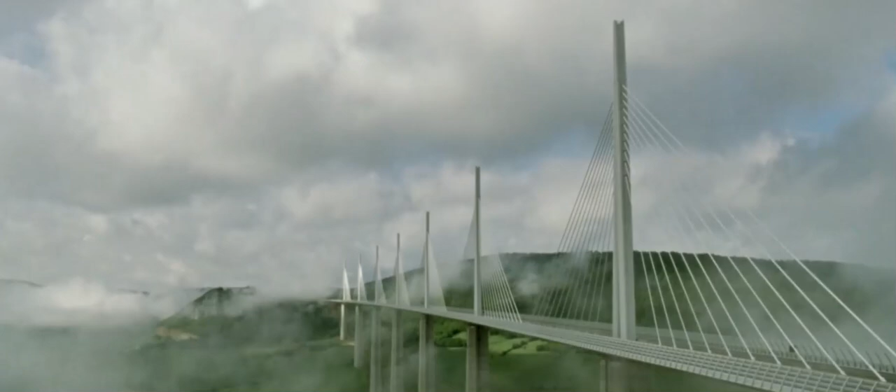So it's become not just the solution to traffic congestion. You can't measure the reduction in the carbon footprint by all the traffic, but just by the trucks alone, it's the equivalent of taking 40,000 tons of CO2 a year out of the atmosphere, the equivalent of planting a forest of some 40,000 trees.

If I change and move to the reference earlier about the foundation, the Norman Foster Foundation, it has three elements: an archive, an educational program, and a projects division. Just to give a hint of some of those activities, the kind of things the foundation can do are sort of activities that it's very difficult, if not really impossible, for a practice to do, coming from a different direction and not having the commercial imperative.

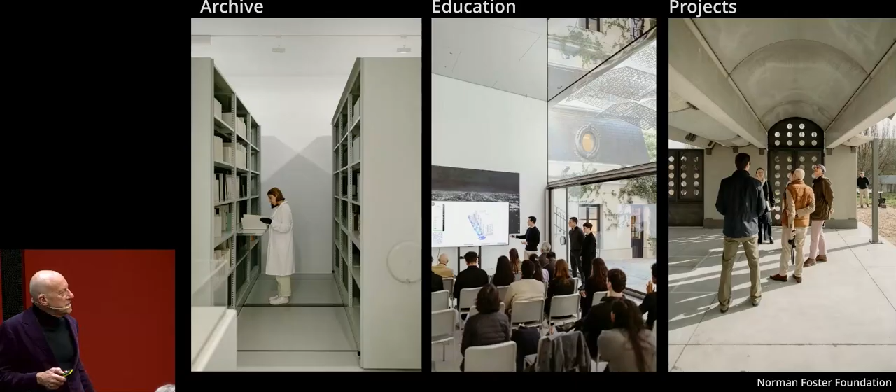So the projects are quite diverse, and I'm just going to show a tiny sprinkling. One is the collaboration with Airbus Materials Research, and I included this because in our last moment of conversation, Flavio, you referred to the Nomos table, so I thought I'd slip in the version which is now Cosmos, which again, in the spirit of doing more with less, is pared right down—the analogy perhaps between the bicycle frame that was steel and the carbon fiber, so really attenuated.

And then the educational side—how do you break down the barriers between the different worlds, as it seemed to us, of design in everyday objects, architecture, and art? So I was invited to demonstrate that theme through the foundation by the Guggenheim Museum in Bilbao.

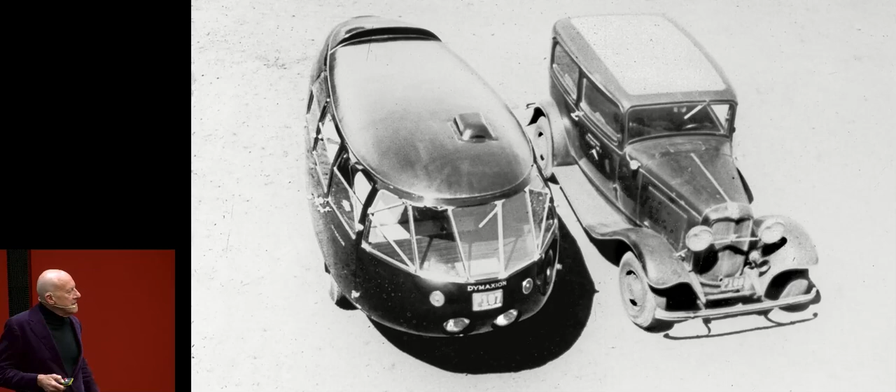One of the many posters features the automobile we recreated as an homage to Buckminster Fuller, the Dymaxion car of 1933. I worked with Fuller for the last 12 years of his life, so this was a kind of homage and a reminder historically that these are of the same period. The Dymaxion on the left uses the same chassis, the same engine, the same transmission as the Ford sedan on the right.

In many ways, this was the birth of the people mover—it has larger volume, it's much faster, it consumes less fuel, and it has the teardrop streamlined form.

And again, the exhibition attracted a totally new audience. It broke all the records for the Guggenheim, but it broke a different kind of record in that the appeal of the automobile, mixing it with art and architecture, created a new audience of people who'd never normally go into a museum.

One of the things I showed was that everybody expects the lunar rover to be a great technical breakthrough between Boeing and NASA in the late 60s. But actually it was anticipated, as you probably know, by the Porsche Phaeton of 1900, which had electric motors built into the hubs, like the lunar rover.

It was also drew attention to the fact that at the turn of the century, there were more automobiles powered by electricity than petrol in New York. And of course, Ferrari had a pride of place in that lineup.

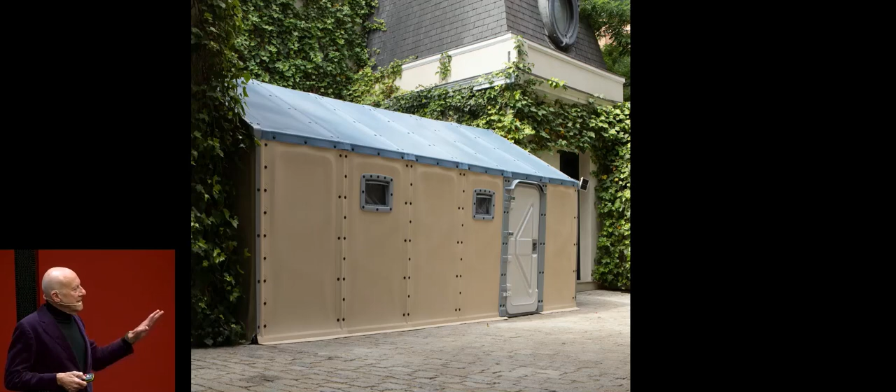So for the workshop, in anticipation of it, we got the most advanced tent, which is a collaboration with a Swedish firm of designers and IKEA, called the Better Shelter. We built it in the courtyard of the foundation. The team, of which I was part, a few days before the scholars arrived, tried to assemble it under a sunny sky in Madrid, imagining what it would be like doing it in monsoon conditions or a climate catastrophe. This most sophisticated of tents has a 3-year life, giving an idea of what life might be like over approaching two decades.

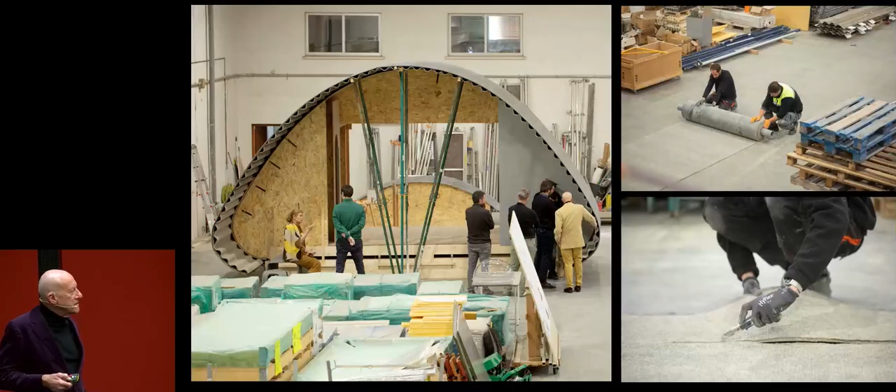So the students, not surprisingly, said there has to be something between a traditional building, which takes years, and a tent that you can put up in 24 or 36 hours, depending on the tent. Afterwards, the sponsors of that workshop approached the project team in the foundation.

The workshop was in June of 2022. They approached us in August and said, could you hit a deadline to proof of concept, demonstrate the feasibility of building something very fast, very cheaply, but durable and permanent, in 6 months' time, for the Venice Biennale. There were times when I never thought it was possible, but miraculously we did pull it off.

The clue to the technology is top right: it's a low carbon concrete impregnated canvas, which when you spray it with water, goes hard within a few hours, and in 24 hours it's structurally rigid. We use the age-old catenary arch. In other words, a builder in the past would hold a piece of string, which would define an arch, and if you stiffen that and turn it, you get your very beautiful catenary arch. In the nick of time, we managed to get that together as a small pavilion.

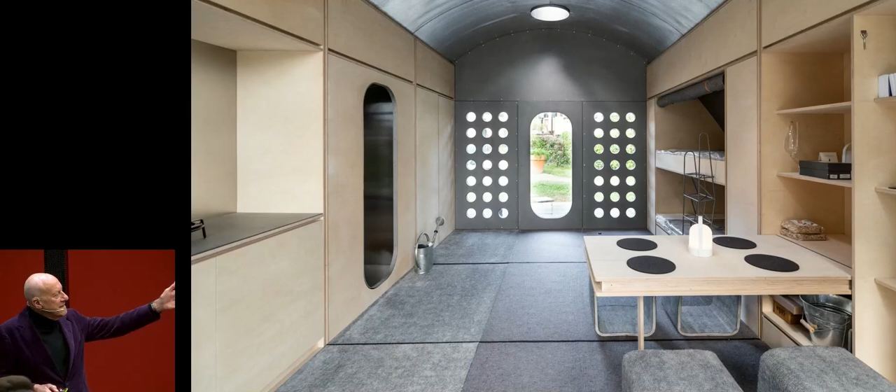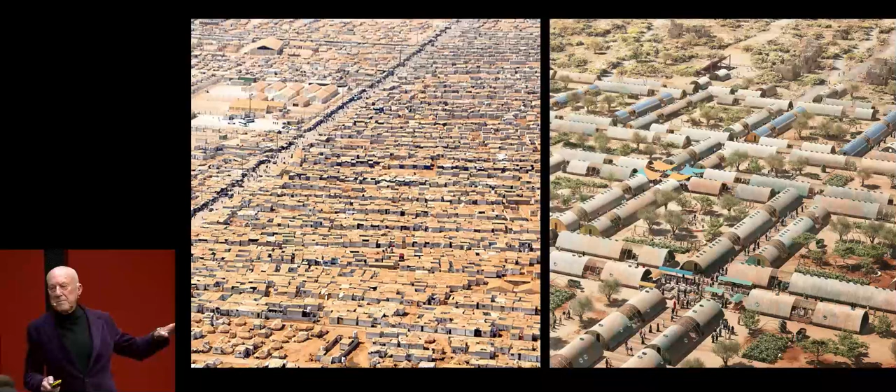You can see the lower parts of the arch are perfect in terms of showers, bunk beds, study, kitchen, giving this central space, as if it was a typical kind of refugee camp. We started to explore how you could create social spaces. This is now the start of another journey, because that was seen by the government of Costa Rica.

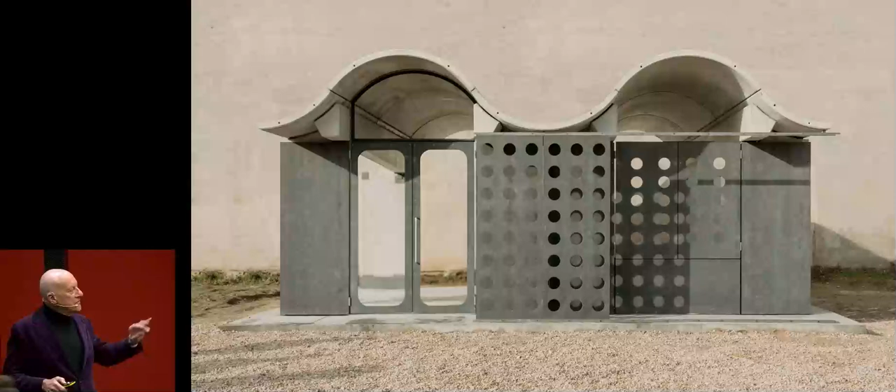They have a housing issue and extraordinary budget limitation, and we are now on course to hit that budget. This is a proof of concept - we were looking at this two weeks ago in Madrid, and we can deliver at scale 500 units of a 2-bathroom, 2-bedroom living kitchen for $16,500, which has to be a record.